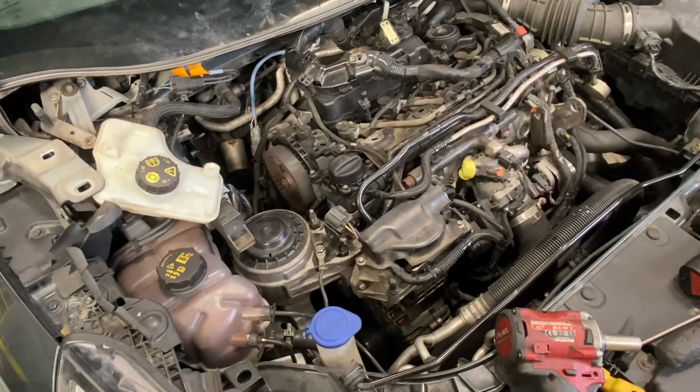We have a 2 litre Peugeot engine inside it, and this thing from the very start has been a pain in my bottom. Started off doing a head gasket on this about 3-4 months ago on YouTube. I put up a short about a crank pulley bolt breaking, and then I had 2 or 3 head bolts, the actual socket part broke off the top of them, and it was just not running smoothly.

After we done that, we put it back together, customer got the car back, and lo and behold, 2 months or so later, an Airtex water pump failed in it. The impeller fell off it, car boiled over again, and I tried to get another pump from someone else, a different brand, but I couldn't get one, so Airtex was the only one I got, and we replaced it with another Airtex pump.

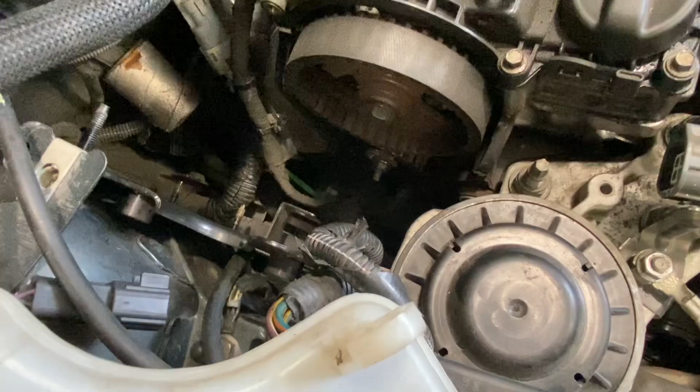Off the car goes, and for the last 2 or 3 months it was grand, but lo and behold, he broke down, and it sounds like there's a broken belt in it. But look what has happened - a layer of carpety stuff has come off the front of the belt.

It has more than likely caused cam sensor faults and airflow faults. It cranks like a yoke that valves are closed on, so we're probably bending and breaking something here, but it turns kind of odd - the initial compression is from the air that's in the cylinders, and then when it can't get in fresh air, creating that fault, it spins away like crazy, like there's a broken timing belt on it.

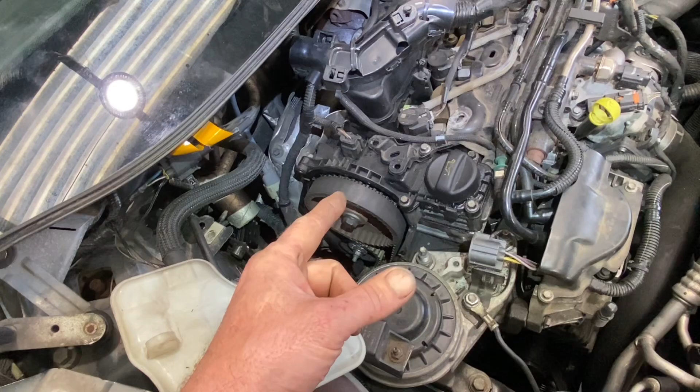But that bit of carpeting and stuff must have got caught underneath the crank pulley and the belt, and then it slipped away and has gone crazy. I don't even know what supplier or whatever I got that belt off of, but lo and behold, that thing is after failing.

I haven't seen this before, but the only reason I'm doing a video on it is because of that. I'm going to get this thing apart. Don't know if it has done damage. Maybe it'll be an interesting video about if there's damage done or if there's not damage done.

But long and short of it is we'll start taking this thing off and see where we end up. Going to pull it apart right now. Engine mounting off, under tray off, support the engine, pull off the belt, get a new belt, fit it on and see what happens. And hopefully there's no damage done, I hope.

I don't want to be doing this for free - hard job getting warranty and all this kind of craic, but for now we'll get a belt and see where we end up, okay?

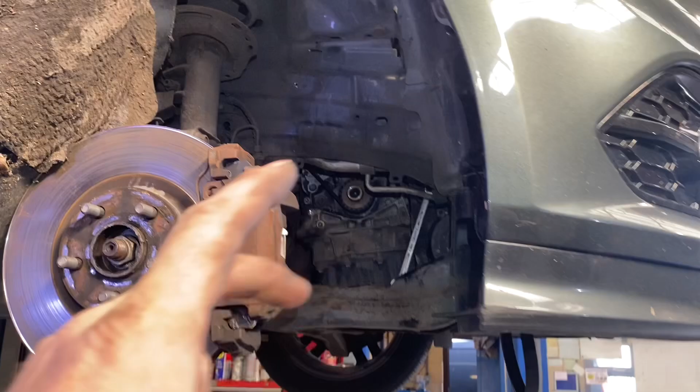Okay guys, not much of a tutorial here. Wing liner down, under tray, sitting in here off. 22 bolt holding in the crank pulley, came out nice and handy.

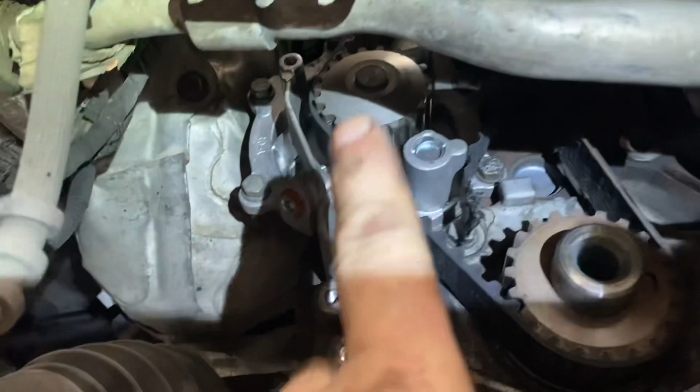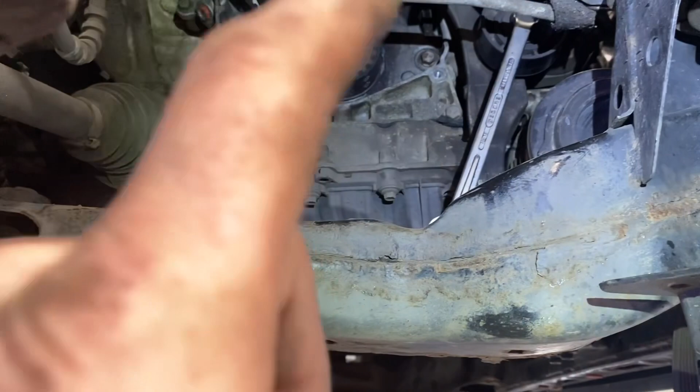Because we had done the water pump on this, as I said, after being on it only a month or so, Alan has a little mark that he had put in here on the flywheel to give us the position of the crank. The original position pin is up behind the starter, but it's hard to get at. So on this occasion, because I'm wanting to know whether I've damaged or not, I'm not going to the original marks. But if we look up here, what has actually happened?

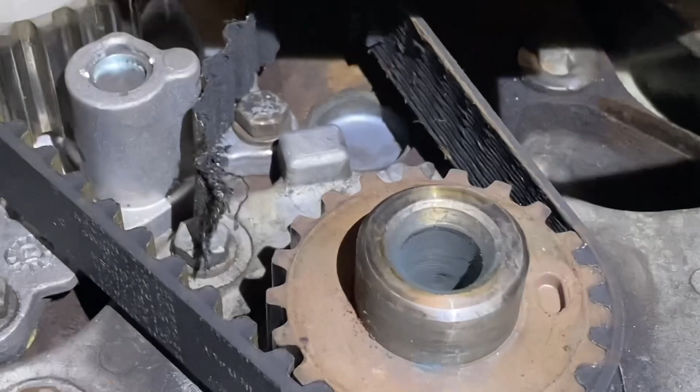The belt, after 7 or 8 thousand miles, has just pulled teeth clean off it. God damn cars. It's an INA belt, from what I can see.

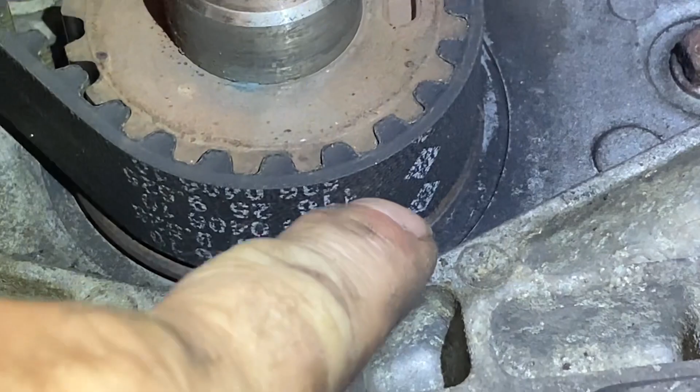So you have to be careful of that, and then the Airtex water pump as well. I know these things go around, but people have asked me, would you think INA would be good or Airtex would be good? And I was saying you'd think a big manufacturer, there'd be no bother with anyone. But look, here we are today in a position because of failure of components.

Don't know. Right, we're going to get the belt off, get it swapped around and see if we've damaged anything.

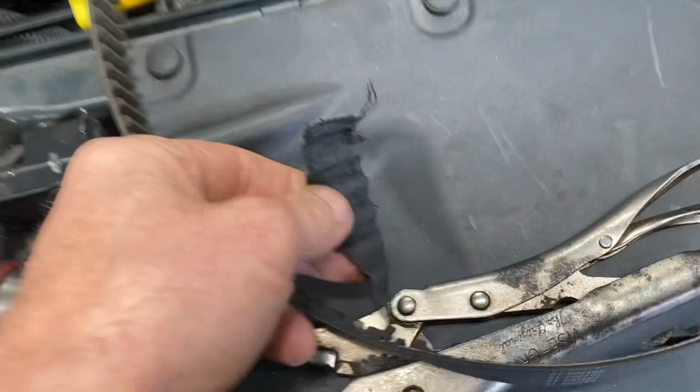Okay guys, what did I do? We've got the belt that's been pulled off it, and I'll show you exactly what has happened there. It wasn't just this layer of carpet that came off it, it actually pulled teeth off the belt.

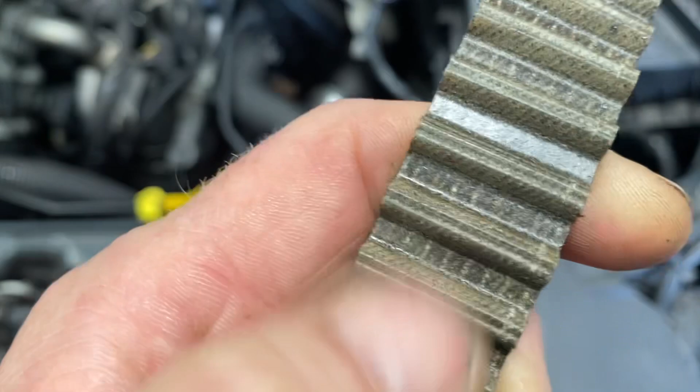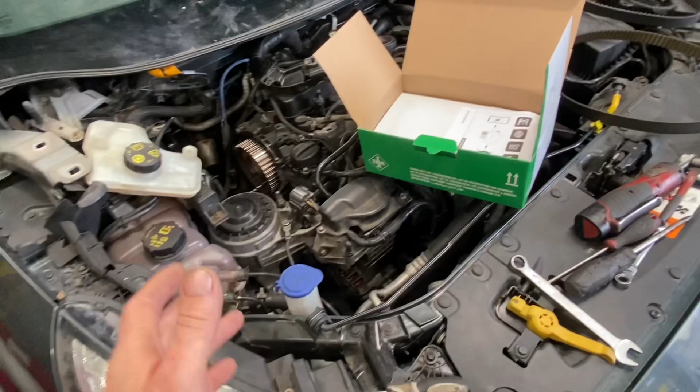Explain why, I can't. I do see this white coating that we normally see on a Volkswagen belt, which is probably a little bit abnormal. Just yesterday online, I wanted to know whether I've done damage on this thing or not, so yesterday I ordered another timing belt kit online.

What did I do? Took off the belt. After I took off the belt, I took it off with Alan's marking, as you saw down below. That was a yellow homemade mark as a reference of the pin being stuck in the locking pin behind the starter motor. But when I did that, I said, oh no, we're going a long way, so I only have a drill bit stuck in here now.

The locking pin on this thing, Alan would have used way back when he changed the actual belt after the water pump had failed.

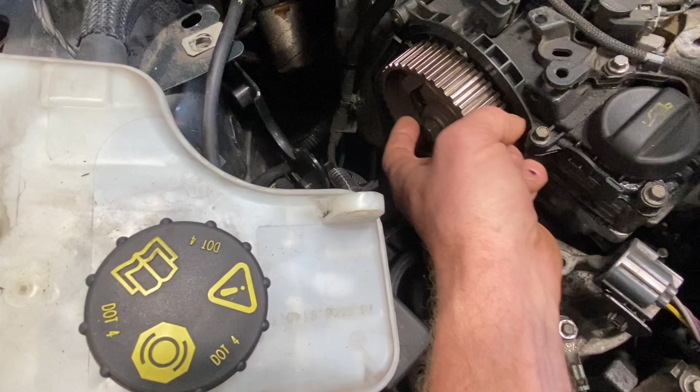Where that hole was sitting right over here, and because it was nearly 180 degrees out, I'm wondering maybe, just maybe, could I have not done too much damage? I don't know, I was vaguely running through it in my head, which I'm not going to go through too hard and heavy. Could I have gone halfway around, and might that halfway around, rather than a little bit out of kilter, have avoided damage? That I can't say.

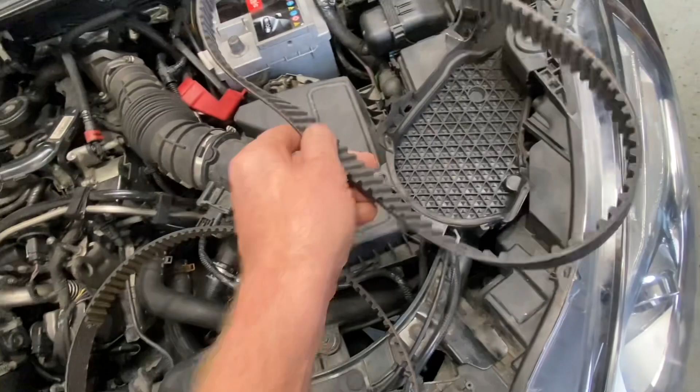Anyway, I ordered this thing online and have it sitting out here now. Done it late, as I said, yesterday evening, and we have the new belt to go in and onto it. Now, one thing some lads are going to say is, after being on the car for a month and a half or so, the belt should have been renewed. But anyway, we didn't, because it was only in there a month. I left it alone, and we fitted this thing back on, in the same directional rotation.

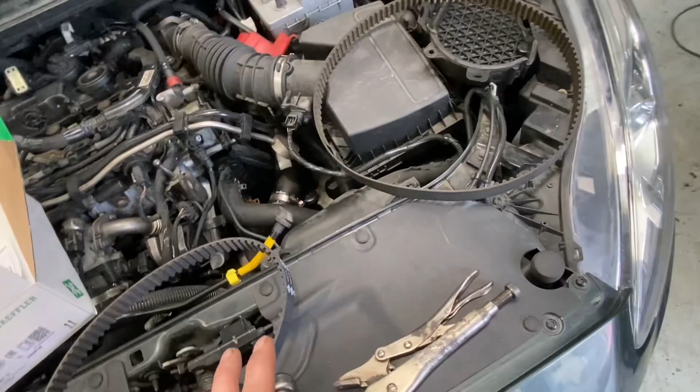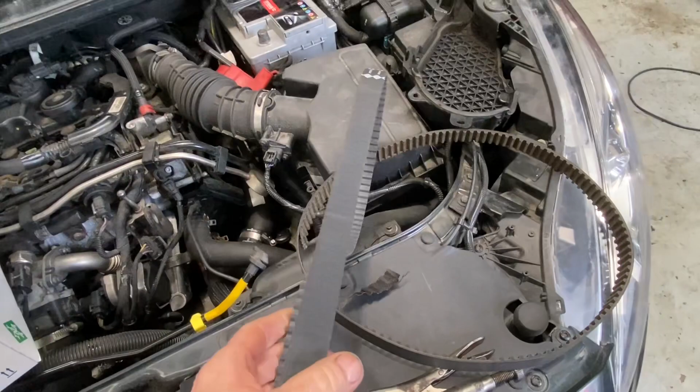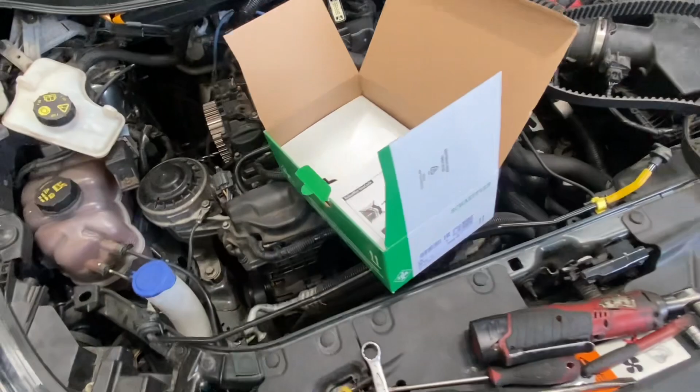So we're going to get this thing together as fast as I can, turn the key and see. I've only just turned the camshaft looking for tight spots all the way around, which it doesn't seem to have. So I'm hoping we're not after doing damage, and that when I put this thing together, I could turn the key and she might just sound like it has compression, or better again, start.

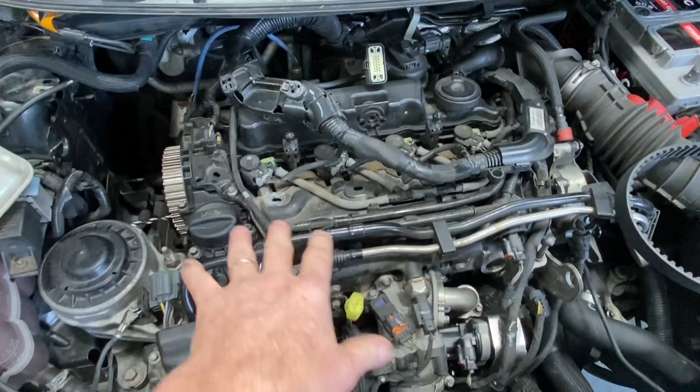If it doesn't, potentially I'm going to be pulling off the cam box up here. Awkward enough, as you can see nothing in here -- injectors have to come up, cam box lift up, and then we'll see if we have bent rockers. But I'm going to refit the belt first and see what happens when I turn the key or press the button. I'm going to put it on now and see where we end up, okay?

As you know, I'm using my mark down here, the Tipp-Ex mark, using that mark. That's as awkward as it's going to get right now. Slap it together and see where we end up.

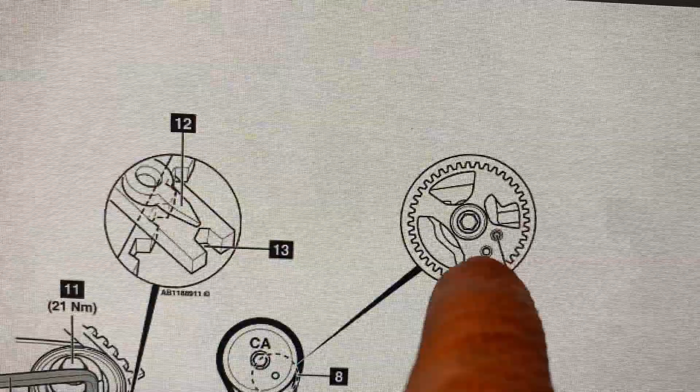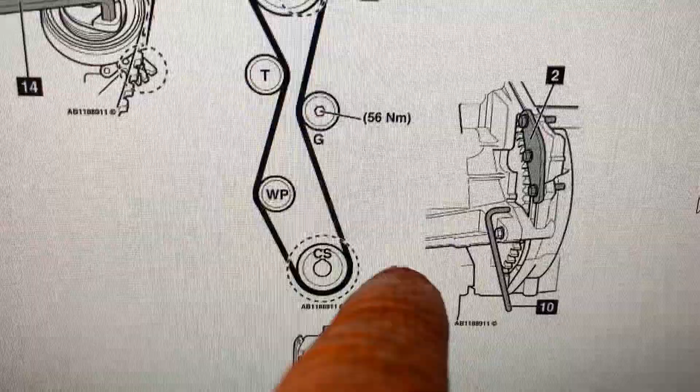Okay, just to show you on a visual aspect, on the cam pulley there's two holes in it. It's the second one that I only have a drill bit in, I don't know, a 6 or 7 mil drill bit or something, and I have that lined up in there. The actual crank pulley, or flywheel locking pin, you can see it in here -- the starter motor sits in there, but that pin Alan lined up, and when he did that the last day while doing the water pump, he also marked the flywheel down there, okay? So I'm not getting in at that because it's quite awkward to get at.

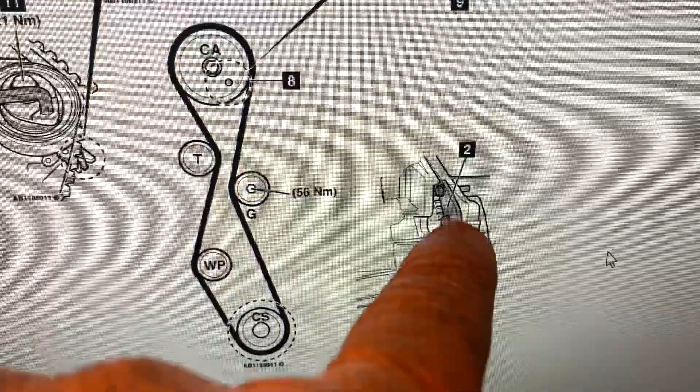I'm not taking out the starter, as I said already. So at this point in time, I have our belt fitted on, I have that pin in there. I just have to line up my little mark down here, as we have fairly well done. There's a flywheel locking device here, but I'm hoping I'm not going to need it, and I'm going to get this together.

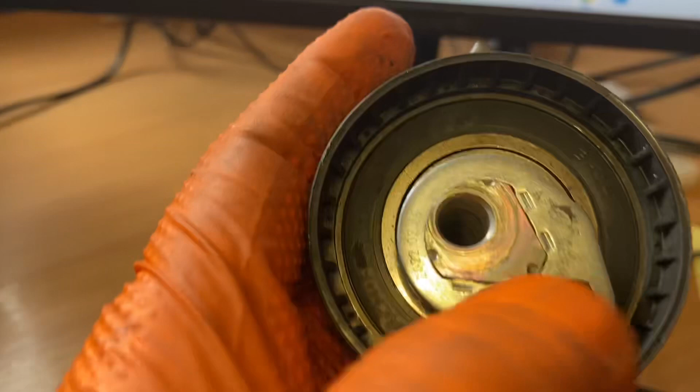Now I'm going to show you about the tensioner, only something small. Can you see it? You can. Right there, there's a little arrow.

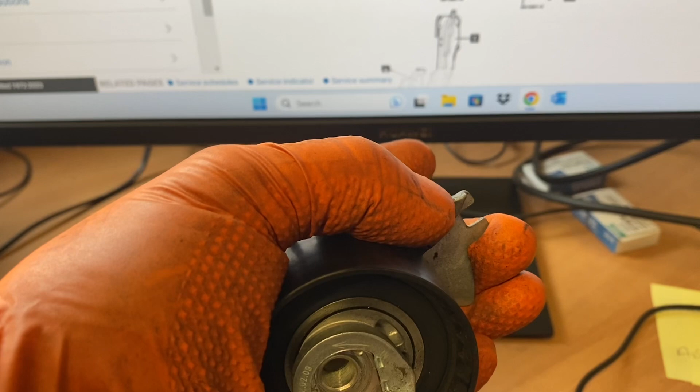So when you're tightening or tensioning these things, it twists anti-clockwise, and when it twists anti-clockwise, your little tensioning tab will pull down, and once that's between those two pins, that's when we can lock our 13 bolt out here. Just to show you the visual side of it, the Allen key goes into the tensioner, it spins around, the 13 bolt then gets squeezed once these tabs are in line, okay?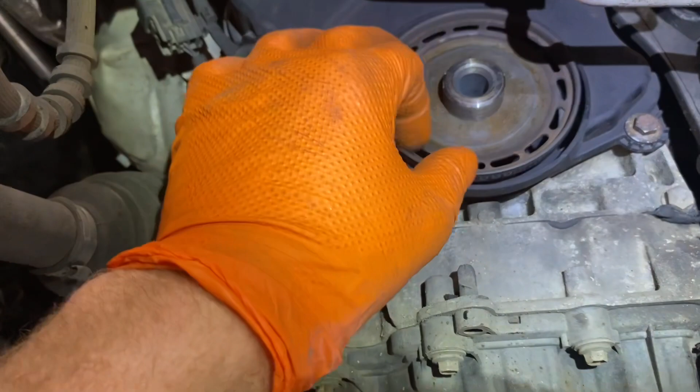All straightforward, so now you know what that is about, and we're going to put it together, turn the key and see. I have my crank sensor on, I have my tone ring sitting on, that's held solid on the crankshaft, and my little mark is in theory lined up, and I'm just going to hold it in that hole there while tightening it with a pry bar, and that's going to be that - good enough for us to turn the engine and see if we got compression at that stage.

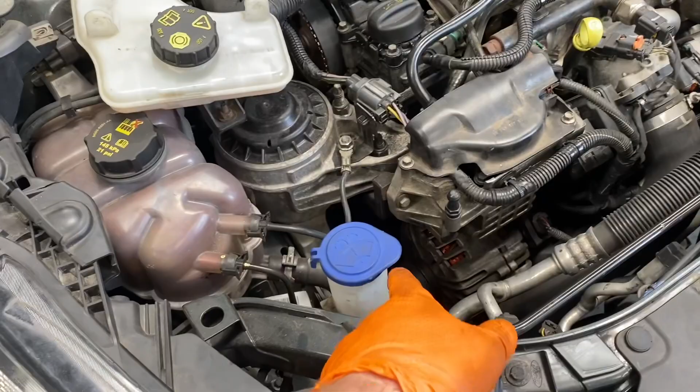Okay, I've reinstated the belt, lined up all my marks. What else? I had an ECU out here yesterday for disassembly. I've just popped it back into place with a couple of bolts holding it on - it's only barely hanging there. I haven't put on timing covers. I have a bottom cover on, alright, to get on the crank pulley, as you saw on the tone ring, but it is back together.

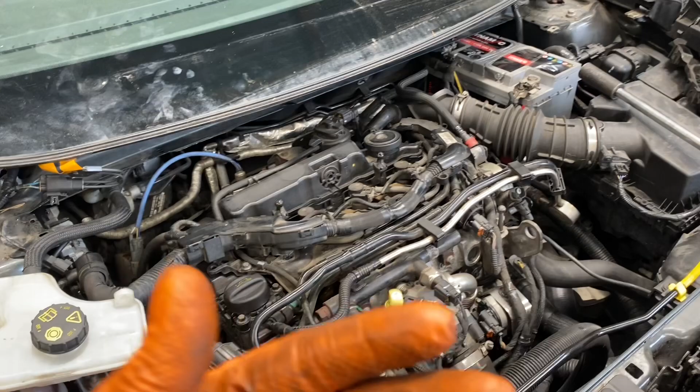It feels okay, I've done two rotations with that, and it feels like there's compression there, but if any of the valves are in theory not opening, you're going to feel like there's compression at the start. When I turn the key, as I said, it turns kind of odd because of stagnant air that's inside it. So I could in theory be feeling compression at this point in time because of stagnant air.

I have the battery connected. I don't think I have anything else. I stuck on the alternator belt, and you'll see the first turn of the key - what'll happen here?

Oh gosh. I hope - just don't need the hardship now of taking this thing apart at this point.

Come on, babe. I have no fault codes cleared as of yet, but what's going to happen when we turn the key? No. She ain't working on you. So that is a non-runner, lads. Yeah, she's not happy. Whatever she's not happy with, she's not happy.

We're going disassembly. Okay, my thought process on this is that I'm going to disassemble a few bits and pieces up the top, a few lines and stuff, and get out 4 injectors, send in a borescope, try and see what's happening in there at the valves. If I can see it, okay, we have a starting point, we have a direction to go. If I can't, I don't know.

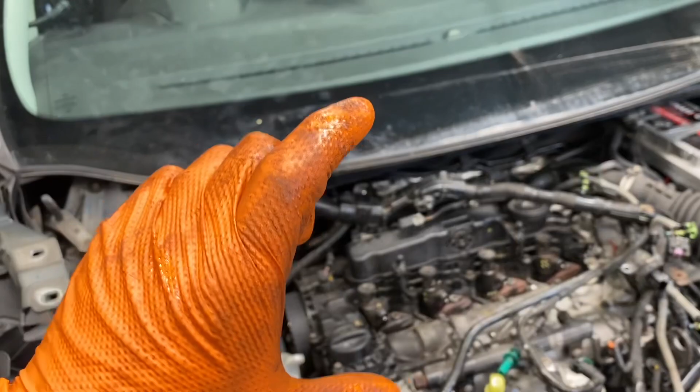I don't think there's valves bent in this, and I don't think that they bend valves, but I do know, and I would say that they break and do damage underneath the rockers, camshafts, all that kind of stuff. So in theory, could I have a chain in here that slipped, and could I have rockers that are getting bent? I think with valves being dead straight, when it gets a straight shot, it actually doesn't bend the valves, it just breaks whatever is above it, and I'm hoping for that.

So I'm going to go in and just see if the valves are opening. When I have a piston heading down the way, I'm going to look and see if I have intake valves opening, 2 of them, in each cylinder. And then on the way back up, I'm going to be looking for exhaust valves opening.

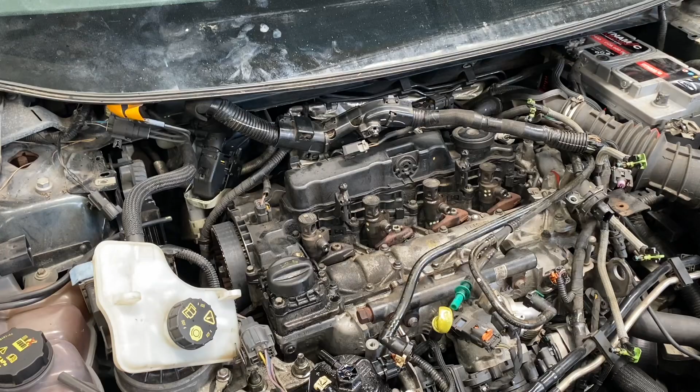Not a good day for mankind having to deal with this stuff, but anyway, neither here nor there. It's the position we're in right now, and we must take out the injectors and just have a look, see what the story is.

That's this business, lads - it goes like that. It doesn't all run to plan, they don't all go as they should do. This is, as my dad used to say years ago, a real Monday morning car. Anyone in this trade is going to hit this kind of stuff. Not a nice engine to work on - everything is awkward, nothing straightforward. You can't just get in like a Volkswagen, or dare I say even a Mazda, and pull it out. But yeah, it has to come apart.

We have to get out these injectors, try and see if we can do a visual on it, and move forward from there. If we need to, we'll take off the cam box. Fingers crossed, I don't need to take off the cylinder head and drop this thing - I'd nearly drop it on the ground, it's just too awkward to take a head off without dropping it. If we need to, but right now we're not going to do that. We'll do a leak down test on the valves, make sure they're closed, and move forward.

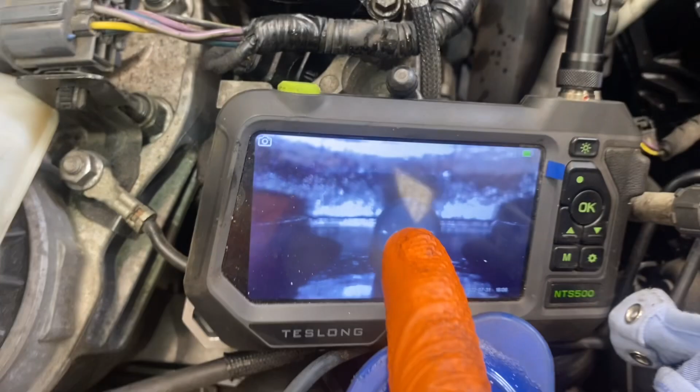Okay guys, what I don't have is a jig for in-cylinder pressure testing, so that's out - that's the reason I'm going for this thing. I'm looking here at 2 valves, I believe they're intake because they're on the front. My side camera is looking forward, the borescope is down in the whole cylinder, and you can see here I have these 2 valves.

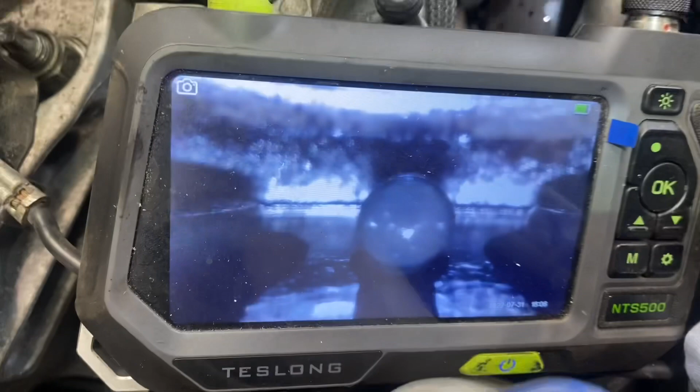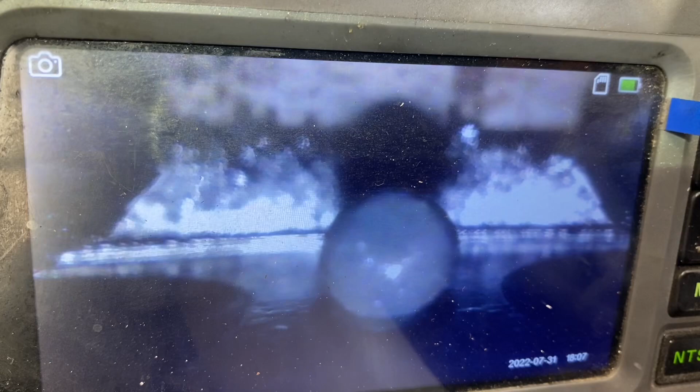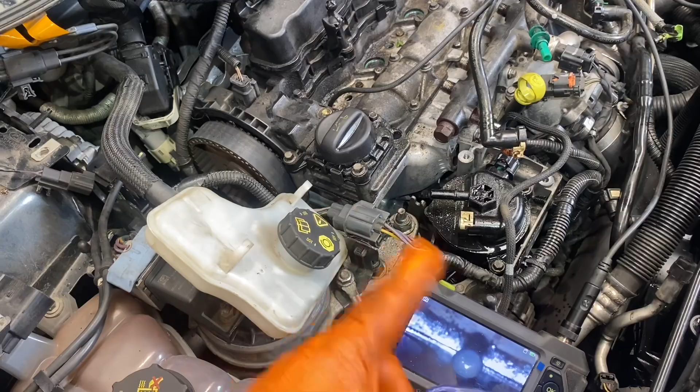See now, opening anyway. Okay, so we've just gone over top center, and I have these 2 valves opening. I might wait - it's going to push my camera up now as soon as they come up to top dead center, so I don't want to break my camera. It's going to be hopefully down on the induction stroke, back up on compression, then the power stroke, then the exhaust stroke. So I'm going to swing around, giving 360 degrees of revolution on this thing, and see how the other side opens. I'm going to do the same thing on each and every cylinder along the way and just see where we end up.

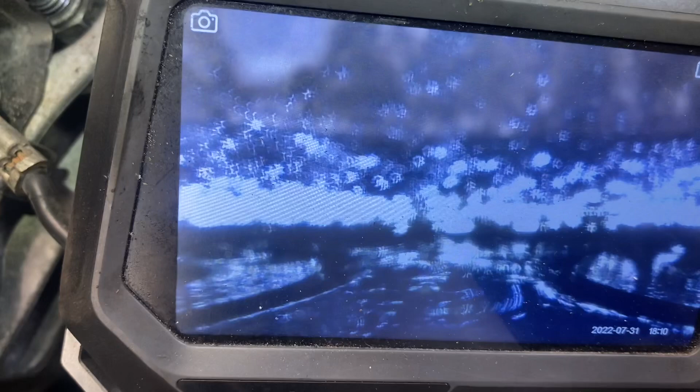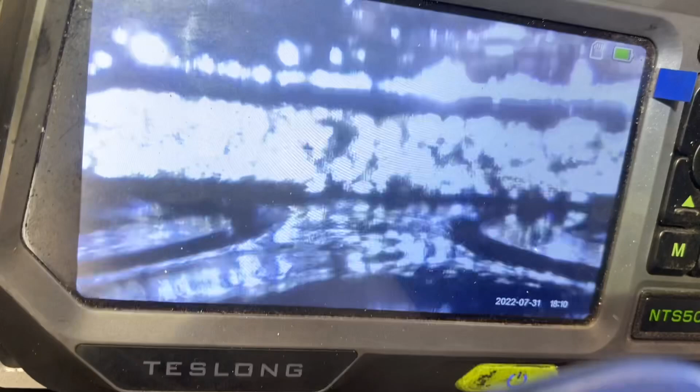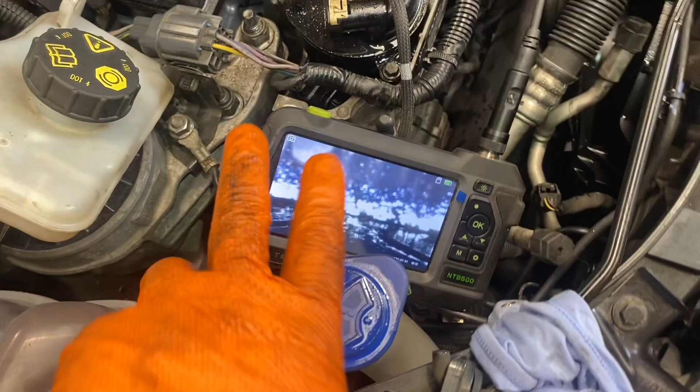So look, the long and short of it is that's proof enough for us to have to take the cam box off the top of this thing and go looking for damage - we have damage done in there. Ooh, the joys of it. Anyway, no one likes doing these jobs when it's falling back upon whoever, whether it's faulty parts or what the heck. If it goes wrong like this, no one wants to see it, but here we are, and we have to resolve it at this stage and do a bit more disassembly. I'm hoping that I can get off the cam box relatively handy up here and get in to see what the heck has gone wrong, do a visual on it. It has to come off to resolve this anyway, so the rest of the cylinders don't bother me at this point in time. We're going to drive on, pull out the cam box and see where we end up.

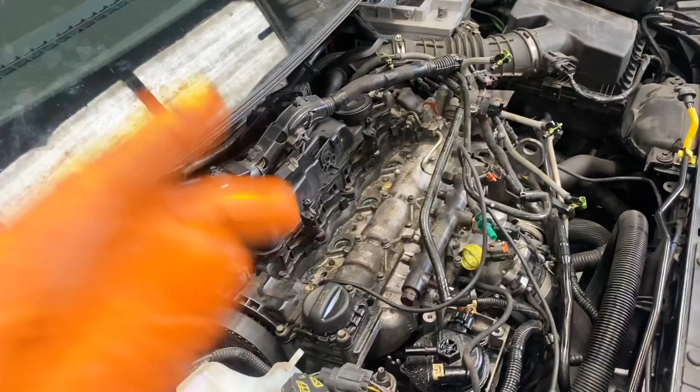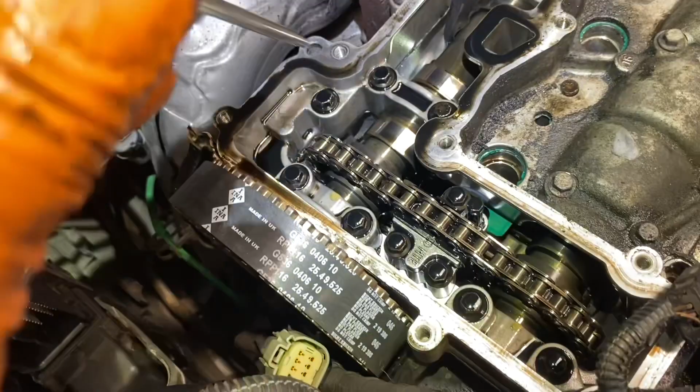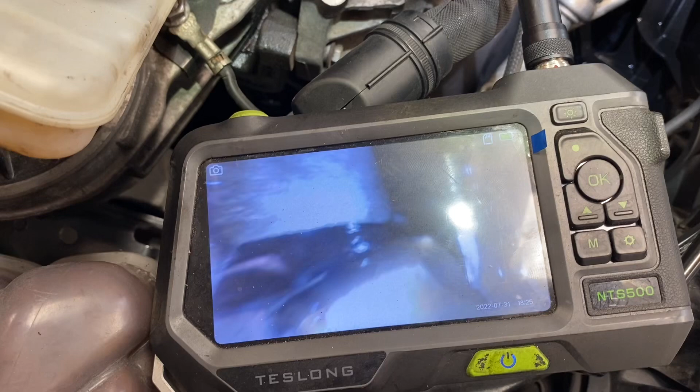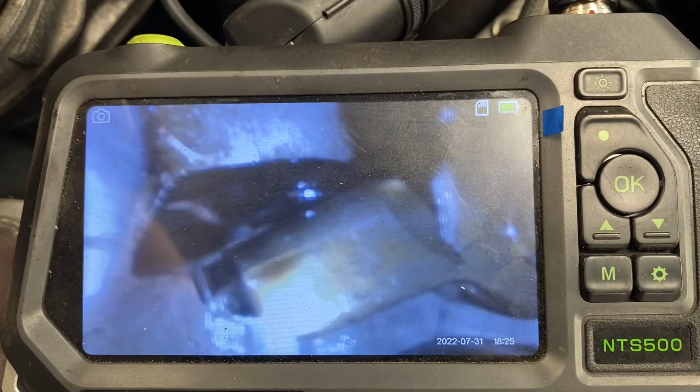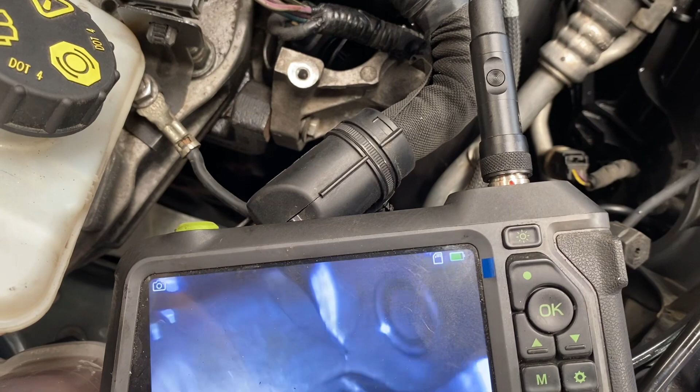Can you see that crack and break in the actual rocker? I can't turn the camera so I can't get a better visual on it. Just that a break in the rocker is straight across the middle, which is hopefully better than having to take the head off it.

So as I said, we'll have to take off that cam box. Belt will have to come off again, cam box off. Hoping I don't have to be touching too much stuff around this area. Maybe I will, probably will, truth be told, because I think... oh no, I don't.

I was going to say that the camshaft will come up with that one, I think. Maybe it won't. Actually, do you know what? This might work out for me that maybe I can leave the cams in there. If I could leave the camshafts in there, I might just get a bit of room, like my Mazdas, and be able to take my camshaft up to change or replace the rockers, and maybe I might be able to not disassemble that side.

I have the high pressure pump and the vacuum pump over there. Everything is stupidly awkward in these things, and the less I've taken apart, the less I'm going to have to go wrong on me. Not that there's not enough gone wrong at this stage, but I'm going to try to get off this cam box with as little disassembly as possible and see where we're at.

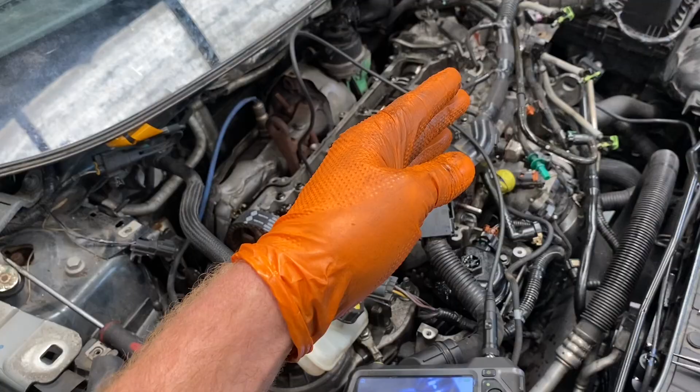I'm probably going to need at least 6 or 8 of these yokes along here, the rockers. I'm hoping that maybe I don't need them here. I've seen on Volkswagens and stuff when they break belts or these little chains, they've bent all the valves on one bank, or whatever we call it - mightn't be called bank, but on the intake or on the exhaust. Hopefully it's just gone out of kilter and damaged these ones over here.

I'm going to drive on, try and get this cam box off and get a few rockers ordered for this, trying to get the thing flowing, okay?

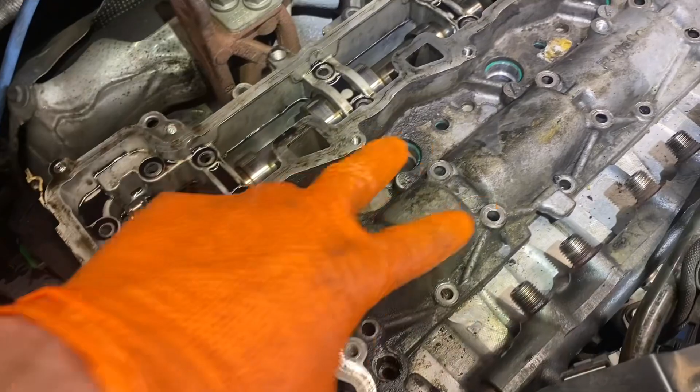Okay guys, I'm after removing a rank of bolts out of here. I don't know if these little ones in here are just holding caps for the camshaft. I do know on this side that they're not. The tensioner sits there - can't remember the last time this was done - but I'm hoping that the tensioner and the chain and the two camshafts kind of stay sitting in situ.

Also I'm hoping over here, because there's kind of a cam gearbox, whatever you want to call it, driving the actual high pressure pump, that by taking one bolt out in there, one back here, and one sitting in the vacuum pump, maybe my cam box will cope without disassembling that in its entirety.

I'm just about to lever it now and see what happens, but I'm going to do it off camera in case it goes quick. Okay guys, I give a little wiggle and a woggle and up she comes. Oh yeah, injector pipe. Okay.

Okay, we are in theory just getting into the rockers. I've 16 of them, a full set coming, so hopefully we're going to have enough to resolve and fix. That's it - we're going to disassemble, get it back together and see where we're at.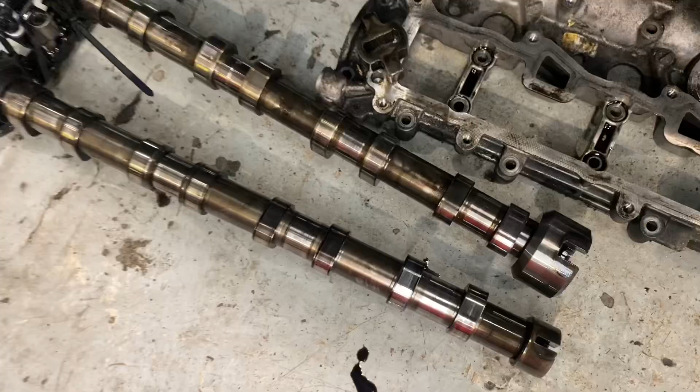Okay, after I pulled up the cam box, I had 3 little bolts holding down my chain here, and I brought the chain up intact, with the cam box and stuff sitting down there. I've also taken up 8 rockers on that side. I'm just going to show you what actually had to happen.

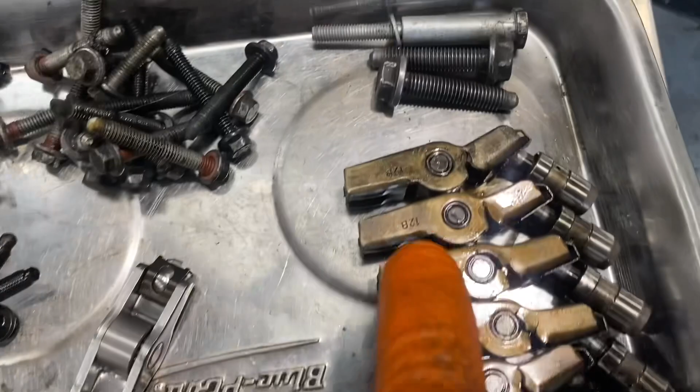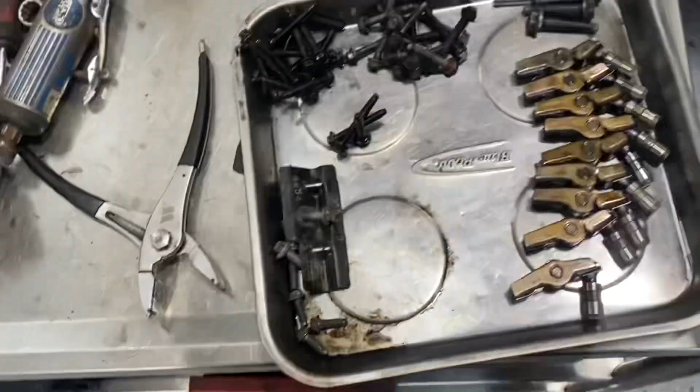So we have 1, 2, 3, 4, 5, 6, 7, and 8 broken. There's one good one to give us a cross reference from - that's an intake one - and that is one of the new ones. We have 8 of these ready to go back in.

Put them in, get our camshaft on, and see where we end up.

Okay, 1, 2, 3, 4, 5, 6, 7, 8 new rockers sitting in there. I've examined them once and they look fine, so we're leaving those alone. I had only just little homemade marks that were in there since the last time the cylinder head was off of this thing, 6 or 8 months ago. It's going back together.

That is cleaned up and ready to be sat in and pull down my camshaft, and yeah, the next step then after that, start reassembling our stuff here.

Okay, we are reassembled with the engine, timing belt back on, cam box squeezed down, and I've given the engine a couple of spins around. I don't have anything to do with a leak down test here. All I used was a blow gun, brought it to top dead center, and on specific cylinders then pushed, and if my engine was trying to turn, I'm suggesting that's going to be enough for me at this point in time to see where we go.

And I do believe we're not leaking. I do have cranked it, and I had a little bit of a compression tester there, which is not really significant to me, but I do have compression in the cylinders. Outside of that, we're reassembling, and hopefully we're going to be awesome.

Rocker cover on, injectors in and torqued, wire looms, some of the fuel lines, pipes going back together, a couple of bolts stuck back in the vacuum pump, and that gear for driving the high pressure pump, brackets, bits and pieces of that, getting there. Another couple of half hours maybe or so, and I should have all these bits and pieces back together, ready to put the battery back in, turn the key, and see where we go.

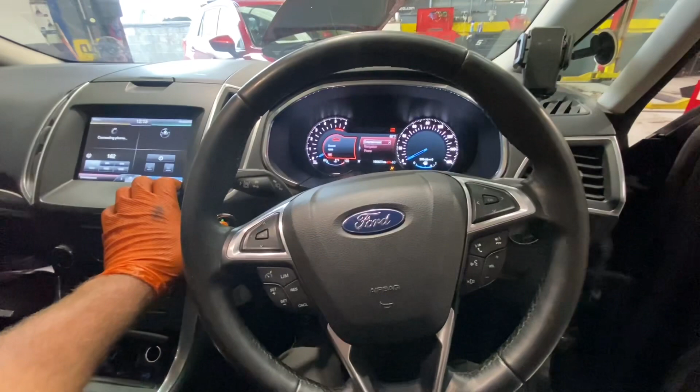Sounds better, the compression. Whoa! Yay!

Don't mind any of these things, because this thing, as I said, didn't get any faults cleared. But anyway, we're running.

With my car in the background keeping me going, but we're up and going. We haven't bent any valves. My bit of a leak down test, be it country style or whatever it may be, is enough for us right now.

Woo! The hardship, where do you go, what do you do? Like, you had a new timing belt on this thing 3 or 4 months ago. We had a water pump that failed in the interim. We have a timing belt that failed, and you're like, oh man, what's going on here, what's kicking me to death? I don't know. But where do you stand? Do you then knock manufacturers because of something happening?

I make mistakes, you make mistakes, we all make mistakes. We don't need this. I am going to be trying to get compensated for this. The customer is not going to be paying for it because it's my accountability. But then I'm pushing that accountability onto the supplier that I got the timing belt kit from.

But at this point in time, we're up and running. The problem is gone, the headache is in theory going to be gone, and we're back to this: going back to the customer, look, I'll get this out on the road, I'll do a few miles to make sure everything's okay, and I'll follow up in a little while. What do we see on this thing?

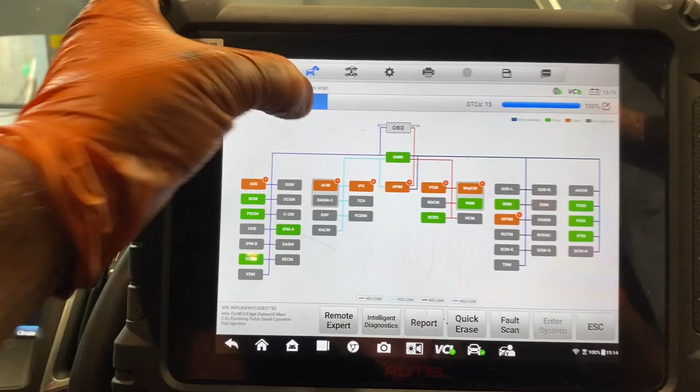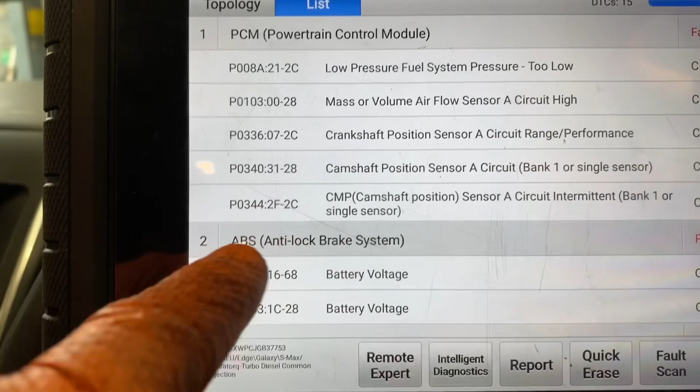Okay guys, one last little thing before I go. These are the faults that were stored: low pressure fuel system, that's us because of cranking, mass airflow, crankshaft position, camshaft position, and camshaft position sensor intermittent.

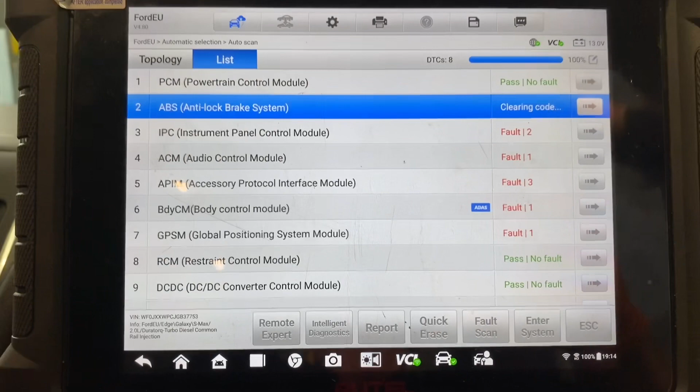The battery went flat on this thing, as you saw, so I have a whole barrage of voltage faults. I'm just going to get rid of them with a quick erase. This is just before we go for our maiden voyage.

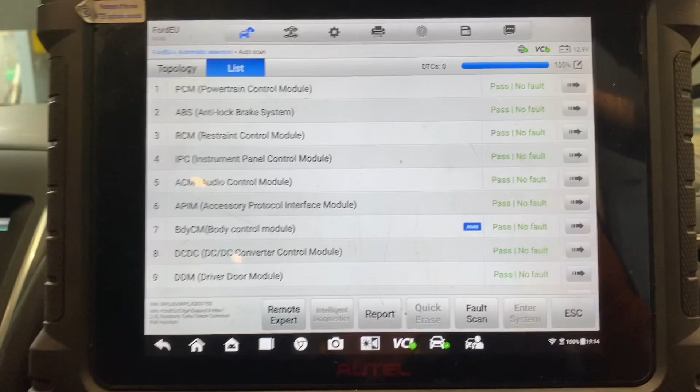We saw the miles that were on it, so it's a case of give her a spin and see. Okay, there's actually 190 something on it there.

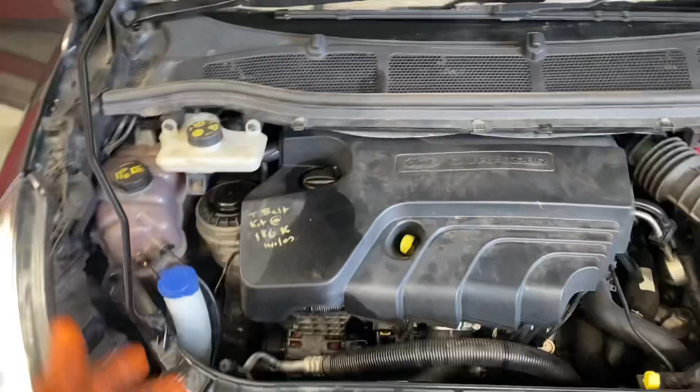Look, the belt and the head gasket was done at 186. Long and short, the engine will have to be washed and all that, and she will have to go out for a couple of miles, but it's up, it's running, it sounds okay, sounds good, and we have all the barrage of plastics and stuff fitted back on at this stage, ready for the high road.

Get our miles done. I'll talk to you in a couple of seconds, I suppose, a couple of hours, a day, whatever it may be for me, but for you, a couple of seconds.

Okay guys, now I actually don't know the exact reference of what miles were done on it, but probably about 100 miles or so done in this thing over the weekend. Car's driving fine, no lights on the dash, everything doing what it should do, and it's ready to go back to the customer.

Now, where are we going? Where do we go on this thing? The warranty claim is in process, so that's not dealt with as of yet.

What we've questioned in our mindset is, what could pull the teeth off of this belt? Would there be a wrong fitment on a pulley, or a pulley with different spacings or something like that? We can't see anything wrong like that. Also, the belt being tensioned a second time after it was fitted and the water pump failed, could that have done it? Don't know.